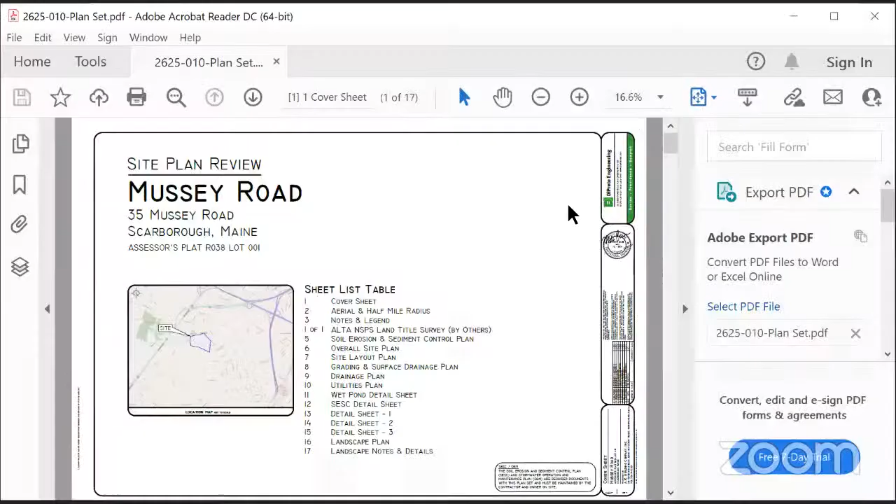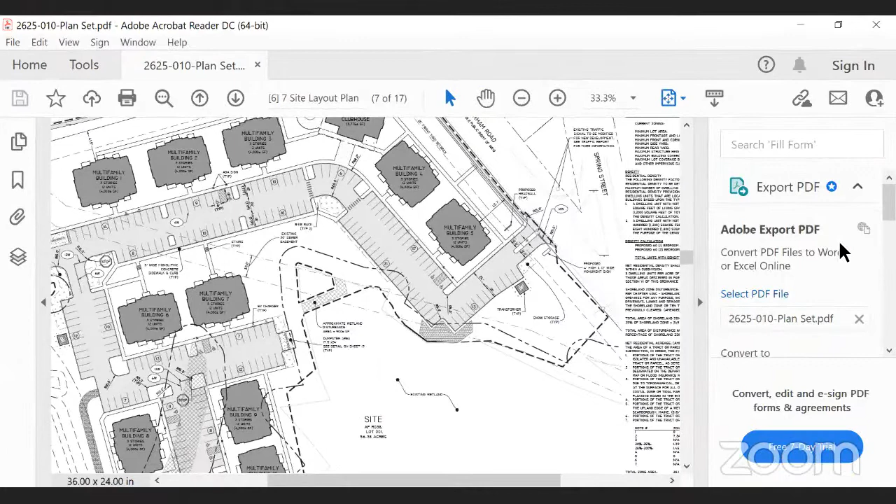Hi, good evening. This is Pam. I'm having a little bit of difficulty sharing my screen right now. I'm not sure what's going on. See if I can allow you to share. Try that. If you're having difficulty, just so you know, we've got a substitute for Doreen taking care of this. Yeah, it's not allowing me to share my screen. Not sure. My apologies for that. Okay, we're just going to bring up the plan sets. Thank you. Just need 1 minute to pull those up on the screen. How's that? That's great, Eric. Thank you. Yep.

So as you can see there, right there on the site plan, our project is located at the corner of Mussey and Gorham Roads. We are proposing 10 12-unit buildings with a mix of 1 and 2 bedrooms. Some of the things that we've talked about with this board in the past is how do we kind of make it fit within that village feel with the TVC zoning. So some of the things that we've added through our conversations is multiple connections down to the streets from the buildings. The buildings are 2-sided, they have an entrance-like feel both from the street, but also from the parking lots as well. The clubhouse is centered at the corner, which includes not only our management office, but a fitness room and clubhouse community room as well as the pool.

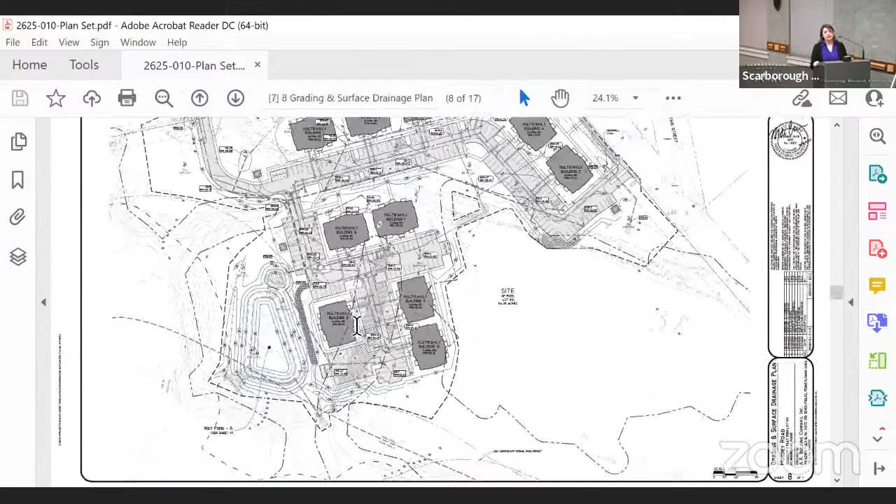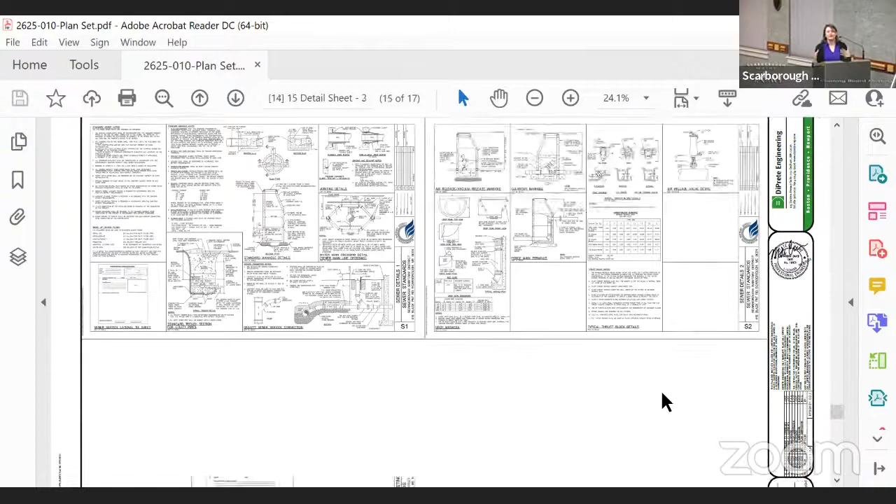I think if you go to one of the other plans, you can also start to see some of the landscaping that we put in and around the buildings, just to kind of really emphasize that street view along Mussey and Gorham Road, but also kind of adding a bit of privacy to the clubhouse and pool, like we discussed with the board last time. Some of the other things that I think the board had comments about was the lighting, so since last meeting we have fixed that to meet your standards. And then some of the remaining questions that we had out there from the planning report that we saw from Eric was that he asked a little bit about the timing of our offsite improvements. So we plan to do those ahead of the Downs project and to make sure that we're coordinating the timing of our pedestrian access.

So what we're building isn't ripped up by the Downs moving in the future. We'll make sure that's coordinated, and we're planning on doing that next year.

Some of the other questions were about the site plan elements, particularly the dumpster area. We typically do that as a design build. It will be a mix of CMU block, brick, and fencing to make sure that it's enclosed.

Another question in the staff report was about addressing. I've worked with the town and come up with two names that haven't been used anywhere else in the town, so we've established those. One is Nonesuch River Lane, and the other is Winter Green Lane.

The other question was about the offsite pedestrian improvements, and Nikki has worked with the town's consultant to figure all of those out. If you have any specific questions about it, Nikki can certainly come up and walk you through those.

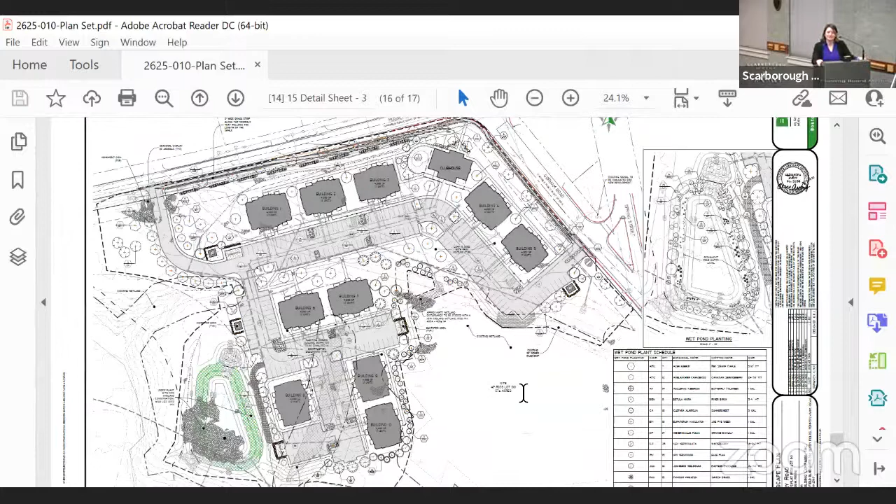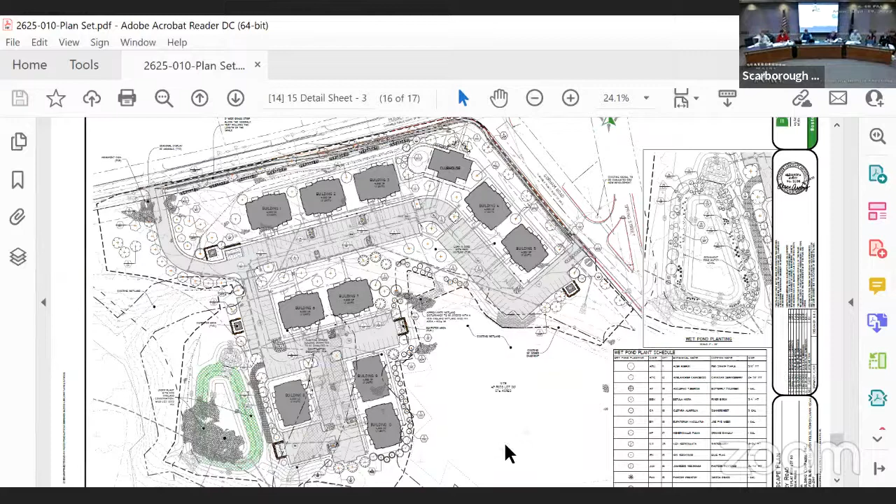Thank you. All right, thank you. This is an item that is available for public comment. Is there anyone in the room that would like to make a comment? Anyone online with a hand raised? No? One person, Madam Chair.

All right, let me promote them. All right, Denise, you should be able to speak. Hi, Denise Hamilton, 167 Two Rod Road.

The applicant had mentioned that these units would be a mix of 1 and 2 bedrooms. Has it been indicated how many of each? Because I'm concerned if there's been any consideration of how this could affect 8 Corners Elementary School, if there's any K through 2 children in those units, and the school being beyond capacity already. Thank you.

For the applicant, could you give us the numbers please? Yes, I certainly can. We are proposing a 50-50 mix, so 60 units would be 1 bedroom, 60 units would be 2 bedrooms. And I can say, looking at our projects, we have a portfolio of over 9,000 units. Our projects don't typically attract families with school-age children. We don't have the playground facilities that usually bring in families.

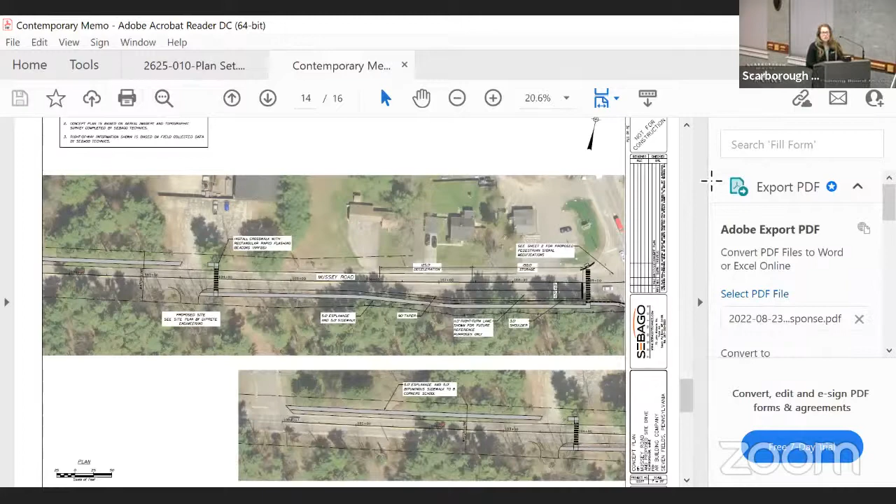Any particular diagram you want to see first? Let's go to the first one at Gorham and Mussey. I'm Nikki Conan with Sebago Technics, by the way. If you go down to the next sheet, yeah.

So basically there aren't pedestrian accommodations at the intersection currently, and the Downs is also not proposing to do any pedestrian accommodations, so everything you see here is associated with our project. At all of the crossings, there should be landings with detectable warning fields and ramps. It's hard to tell at this scale, but there are pedestal poles with push buttons and pedestrian signal heads. In some instances they're mounted to existing strain poles, in others there are actual new pedestal poles, but we'll work through final placement and conduit runs to make sure everything's ADA compliant in final design.

So is there a reason those aren't on the site plans as well? They can be, yeah.

This got submitted as a separate response to the traffic comments, but if the board would like to see this on the site plan, we're more than happy to coordinate that effort.

I think because we did have some comments earlier on, and we've been talking about it a number of times, I do think it helps round out the development and how you're fitting in with the rest of the zone and the neighborhood. I think it's great that these are being added, and it would be great to tell the whole story on your plans. So thank you for pulling those up.

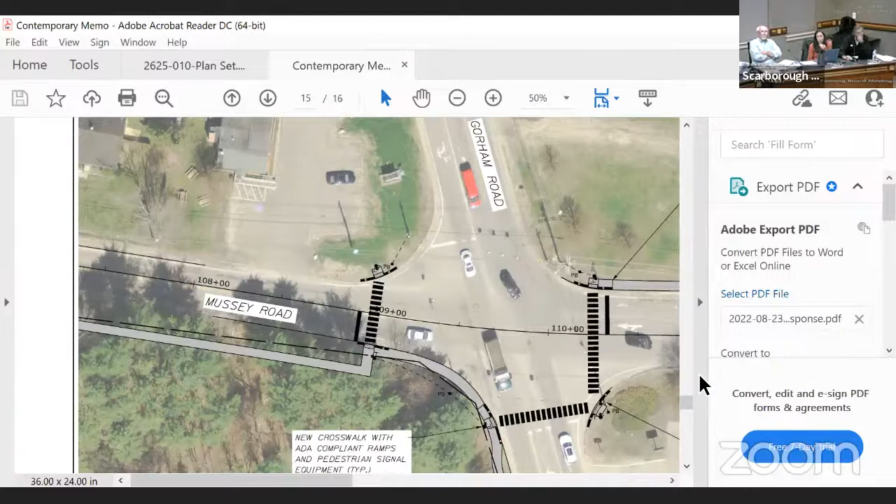But I'm curious about why right at the corner you're holding that so close to the curb line and the travel lane. I think it's great that along the other frontages of the development you're able to hold that back a little bit to provide both some esplanade and buffer space to the roadways, but also for snow storage. So I was just curious why right at the corner, particularly if there's no ramp right there, it's in that location and not held back a little further.

Yep, so originally the intent was—and Eric, if you scroll back up to the first sheet, that does show what the right turn lane would look like—there is existing curb around that corner. So the intent was to put the sidewalk at the curb line and not interfere significantly with their frontage, because the clubhouse is going there and they're trying to put landscaping and make that more of a focal point. But we can definitely work through it if the board would prefer that be set back like the rest of the sidewalk. I wouldn't think that would have significant grading impacts to what's been proposed.

Okay, I wasn't sure if it did. I don't think it's super steep right up there against the corner, but I think what you're showing elsewhere on the site is great, and it would be great to continue that around that corner if there's sufficient room. Absolutely.

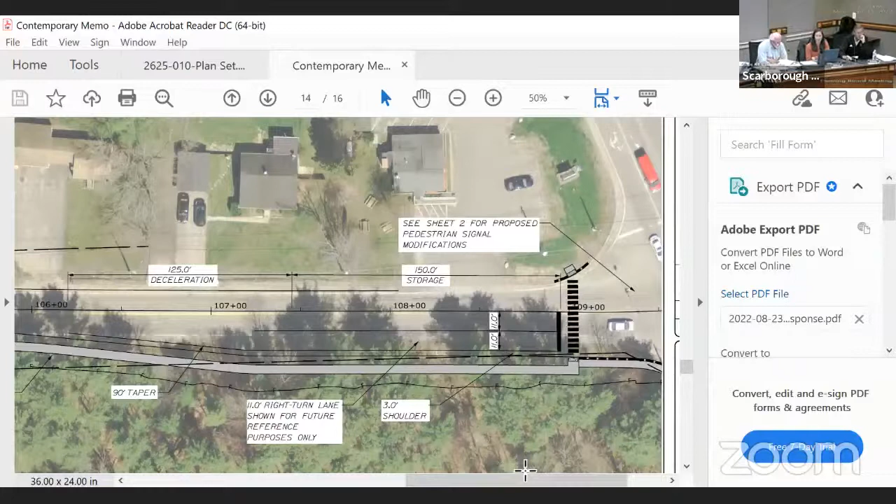Other than that, I'm fine with staff working with the applicant down the road for specifics on the dumpster enclosure, and I don't have any other questions.

Thank you. Roger? I'm basically satisfied with everything too, especially if you could address the comments my colleague has. I do have a question though, a technical question for Eric on the land trust letter.

We'll talk about that. Is that specific to this? Oh, it's not? I'm sorry. No, we will address that under correspondence. Okay.

All right, I have one additional comment. Just as a reminder, we did receive communications under public opinion. We did receive communication from Dennis and Barbara Doherty concerning our approving this. They were very enthusiastic about the project.

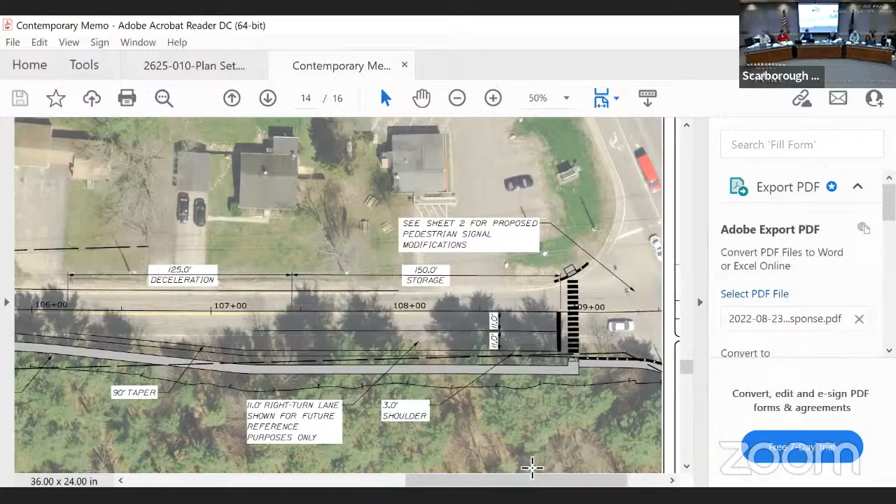Okay, as soon as you have that permit, work with the staff, make sure you've dotted all your i's, crossed the t's, got everything completed, and you will go on the agenda as a consent item. Thank you very much, everybody. I appreciate it.

Item number 7, Crossroads Holding LLC is requesting a subdivision amendment review for the 5th Amended subdivision of the Town Center Residential District to include a drainage easement and 8 single-family homes on Lot 35. Property is further identified as Assessors Map U55, Lot 35.

Eric, thank you. This project was previously before the board back in August. At its August 29th meeting, the board generally inquired about communal spaces and some lighting detailing. Staff has remaining comments on smaller items such as addressing and some fire lane striping, and has prepared a draft motion for the project for the board's consideration. With that, I turn it back to you, Madam Chair.

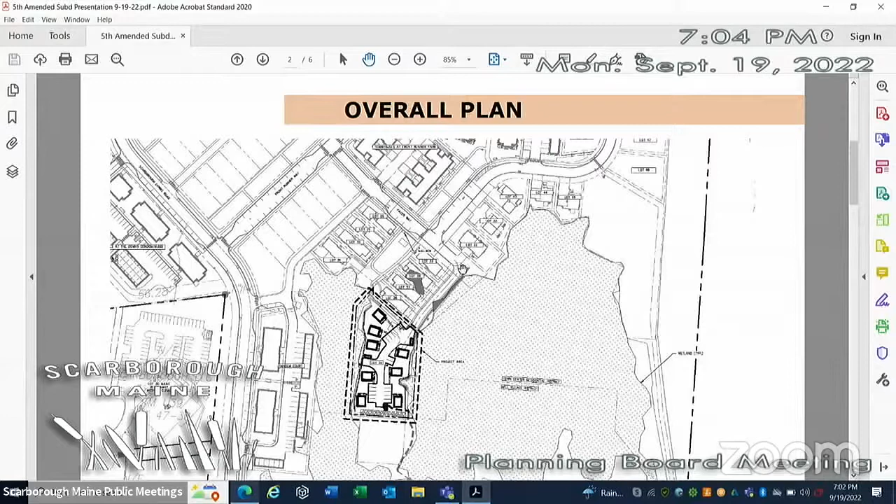Plan updates. As you can see, we're still proposing 8 microhome units, same orientation, as well as 18 parking spaces. I think 2 per single family unit with 2 extra visitor spaces. So a couple plan updates that are shown on this screen that weren't in your package that went in for this meeting.

Working with town staff and fire department and the trash collecting vendor, we've actually increased the private access drive in this portion to 20 feet of paved width. That gets us down to where the hammerhead turnaround is proposed for the fire truck as well as the trash vendor. So we've removed or eliminated the reinforced turf and mountable curb on either side, making it easier for all parties to get down to that location.

Another item that was not in your packet that's been revised since was the trailhead location that enters the project down at the south.

Working with the town engineer, we've actually provided the access to the side of the access drive. Even though there's no snow storage proposed at this location, we understand that plowing can sometimes push snow even where it's not delineated. So we've moved it to the side to ensure there's no snow plow piles prohibiting trail use in that location.

In addition, we provided bollard lighting, which was included in your packet, at each trailhead location and the sidewalk to the north of the site, as well as in the middle, to provide some lighting for residents of the project, as well as some guidance for the trail goers passing through the site.

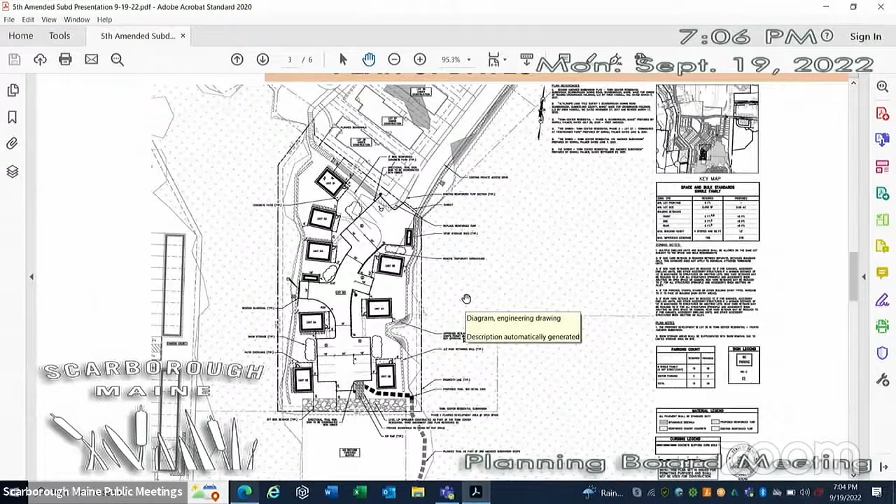So, key updates and comments we've received to date. As mentioned, trash pickup's been reviewed and approved by the vendor. For fire department access, we're providing a 20-foot clear width, no fire lane, no reinforced turf for the fire lane. This is all paved locations per request, so we've made that revision.

Private alley and drive width. This private alley that we're proposing is consistent with or beyond what we've been doing in the Downs and in the town to date. What I've highlighted here in red are private alleys that we've provided in town center residential to date. I won't go through every single one, but essentially there's either 20-foot paved width or 16-foot paved width with reinforced turf.

Hayloft Lane here, Daisy Cutter by my mouse, Futurity Lane down here. There's an unnamed private access drive up to townhouses, as well as the one approved through the 3rd amended town center residential subdivision, which is essentially the access drive provided to this site.

This location on the right is a blow-up of right south of Hayloft Apartments, located right off of Daisy Cutter. What I provided this for was to show visitor parking spaces for single family residents along here. It's at essentially the same width and design that we're proposing tonight for the private access drive. I just wanted to draw everyone's attention to that.

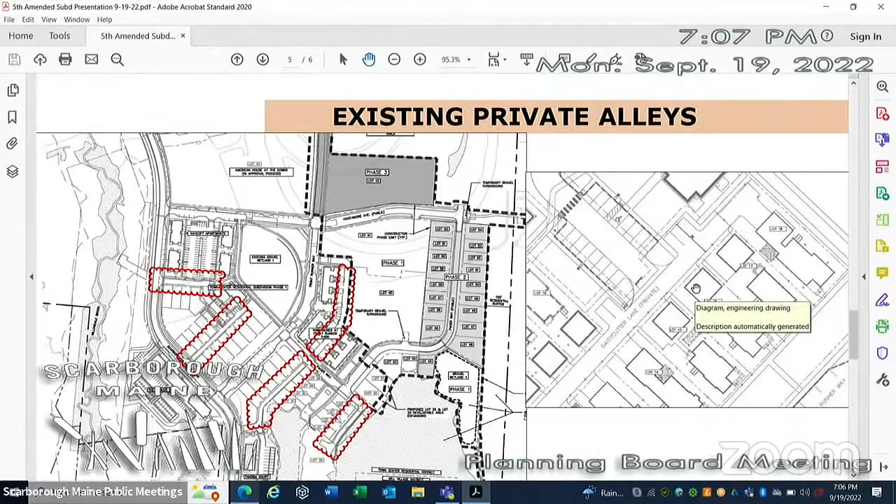I know there was a request for the drive aisle, and I want to point out that while this isn't a formal parking lot drive aisle, we understand the town has recommended that this would become a waiver, reducing it from the typical 25 feet to 20 feet for our project. So we are fine requesting that as a formal waiver.

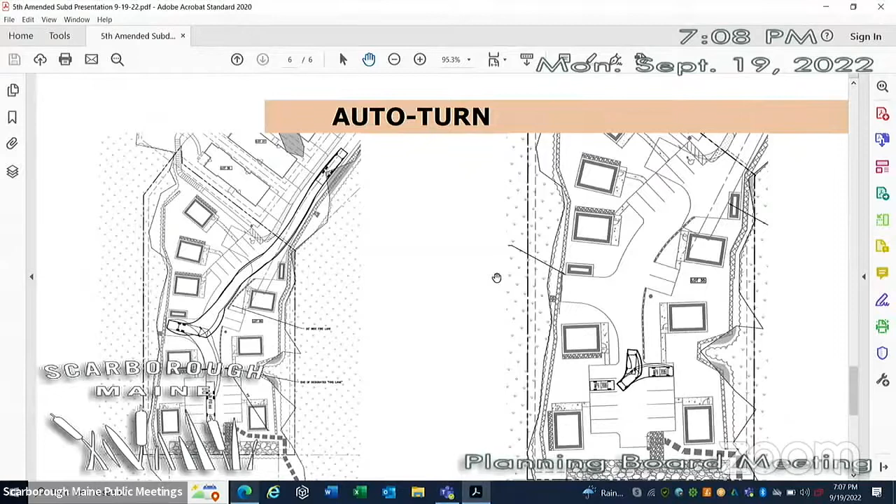We just want to show the movements and show that the design vehicle for this site is meant to be tight, meant to feel like a small residential design given the size of the units we're proposing here. So we mentioned that, but we will formally request a waiver if it's required.

I did mention previously the bollard lighting as well as the trail signage has been provided. In addition to the bollards at each end of where the trail connects in, we're providing wayfinding signs that will work out the details directing trail goers to the north or south end of the site.

In addition, I'll let Crossroads discuss this if they want to, but they've scheduled a meeting with the Housing Alliance per request from the board from the last meeting. That's all I have. I'm happy to answer questions. I'm looking forward to hopeful approval. Thank you.

Thank you. This is subject to public comment. Is there anyone in the room that would care to comment? If so, please approach the podium.

Do we have anyone online? No one online. All right, in that case, as I can find my gavel, public comment is over.

Turn this to the board and let's start down this way. Chad.

So the shared or common building, could you review that one again? From the last meeting, what was contained within that?

You talking about the proposed storage sheds on site? Yes, those are still located at the northern end and one down in the middle of the site. Those are essentially a 4x8 storage shed that's also proposed as the trash pickup location. We worked that out with the trash vendor to have these locations be picked up right there with them. So it's secured, correct, they'll have a door. It'll have a door and the ability to lock and secure it. Great, thank you.

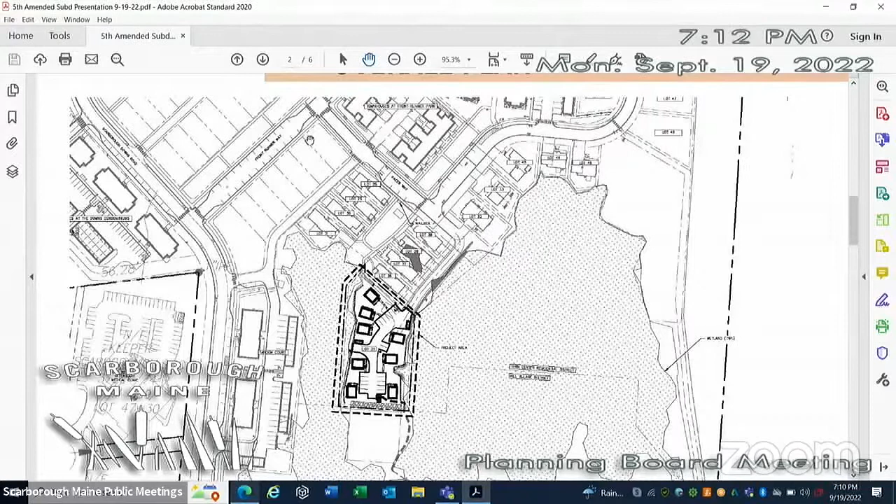Sure. So when you do amendments to an existing drawing, that's how we do this to make our life easier. I try especially hard to better understand by pictures and colors, there's lots of crayons I can do myself with that drawing. But I'm looking at these two sets, and I don't know where these 8-family homes are, and I'm not exactly sure why they're exempt from the site plan process.

Rick, could you look at C101? That gives you a better view of where they are in the development. Let me see if I can- And we had approved that lot when we approved, I believe at the same time we approved the cottages and the open space off of Pacer Way, pretty much at the same time. So yeah, I kind of got it now.

So on the first, second drawing of the set, it shows the empty lot. Then on C101, it shows the buildings in the empty lot. Okay, and if you take a look at that, still on C101, you can see the trailhead that goes down and connects to Gristmill Lane. Yeah.

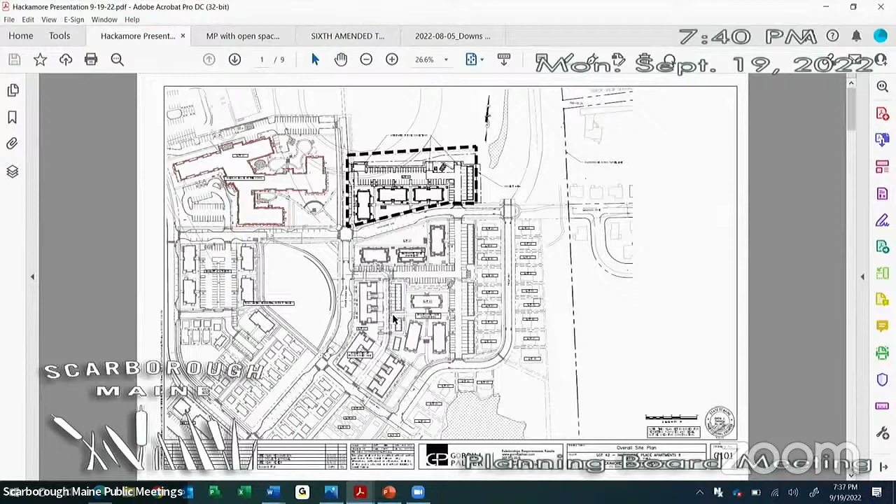In terms of more detailed layout, there's 3 buildings proposed, with 15 units per building. They're configured to, in a way, mirror the layout of the apartments across the street, but also have a nice strong connection to both Front Runner Way, which is on the left here, as well as Hackamore Avenue below the units on the plan.

There are 2 access points. One will be off of Front Runner to provide access across from the senior care facility. Then there's another access point proposed directly across from the apartments across the street on Hackamore Avenue. This is the vicinity where there would be access easements. These have been designed so they can provide access to this project, but also in the future as more planning occurs, to provide internal driveway connections to development just to the north. This driveway coming off of Front Runner Avenue, coming in, you would turn right to access parking for these units, or turn left to access future development there.

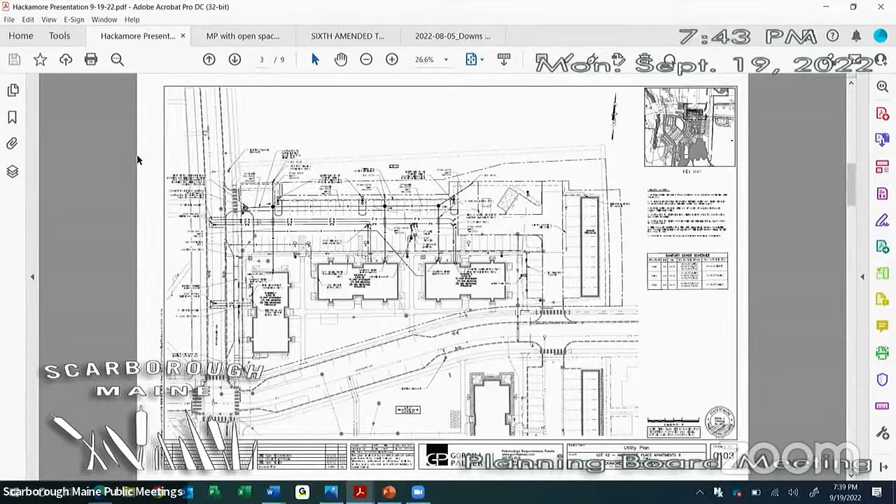I'll jump to the utilities, and Drew will jump up and explain more details on those. The primary utilities to serve the project will come off of Front Runner, and Front Runner has not been constructed yet, so that's good from a connection standpoint—we're not getting back into Hackamore Avenue for utilities, which is at least binder paved at this point. So water, sewer, most of the utilities are coming off of Front Runner to provide services to each of the buildings. We've designed them to also be able to serve future development to the north, particularly for sewer, and Drew can jump into those details if you want to hear about those.

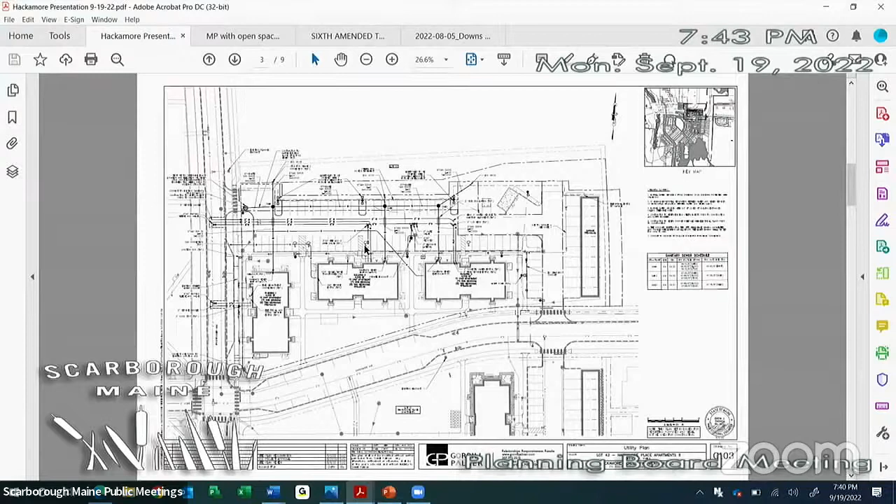In terms of the landscape plan, this is the landscape plan. We've designed this somewhat similar to the apartments across the street, with a larger front lawn area between Hackamore Avenue and the buildings. We also have a terrace area for outdoor sitting and activity for residents, located at the crossroads of the sidewalk system. There's robust plantings around the base of the building, as well as street trees around the lawn area, and also along the perimeter of the buildings by the parking lot.

You'll see on this layout, and also when we get into the building architecture, that the first floor programming is a good bit different than other apartments done at the Downs, where there's actually 7 units on the first floor.

So 4 of those units are accessed directly from the exterior, with sidewalks to each of those entry points into the first floor for the end units in the building. Then there are 3 units that access the first floor from the common hallway. And of course, the upstairs units are accessed from a common hallway and stairway.

So we've designed that in a way to provide more individual entrances and outdoor patios for those 4 units on each end of the buildings.

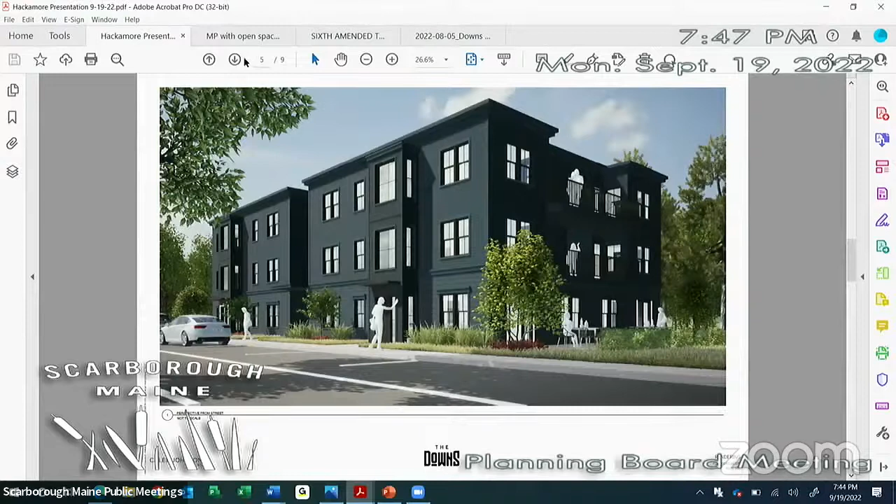We're also varying the siding width and material between the first floor and the upper stories. That gives a sense of the aesthetics of the building exterior, and this shows you the typical elevations.

And I think with that, I'll stop there, and I'm pleased to answer questions that the board may have.

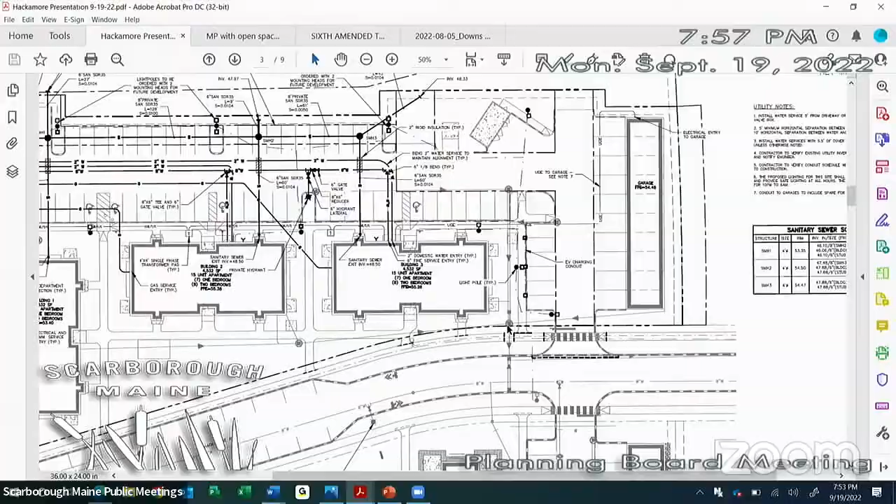So you're putting power into the garage? Yeah, the intention with this site plan is to actually have a separate transformer for that area of the project. We've run into trouble trying to manage some of these off of one building's house meter, and we're working through that. So that's the intention, is to do that installation, and we've also been doing conduit for future opportunities.

We're actually meeting tomorrow with Revision Energy to talk more about different charging opportunities, in terms of how you can group them so they can charge a car faster, and then when it gets near full, it can shift power to another charger on that same pedestal, among other things. So we're just meeting with them specific to this, because as you know, we're not experts, and it's a very emerging kind of thing in terms of how to incorporate it. But that's our intention here.

I think the note about the future is it's also more as time goes by. I'm just worried that we're missing opportunities in our residential areas specifically, and I've mentioned it more than once. So regardless of that, I'm glad to hear you're working on it. Are the ones you've done networked, or are they just off the meter? The ones we've done so far on the project have been off the meter and tied into one apartment building. That's all I have, Madam Chair.

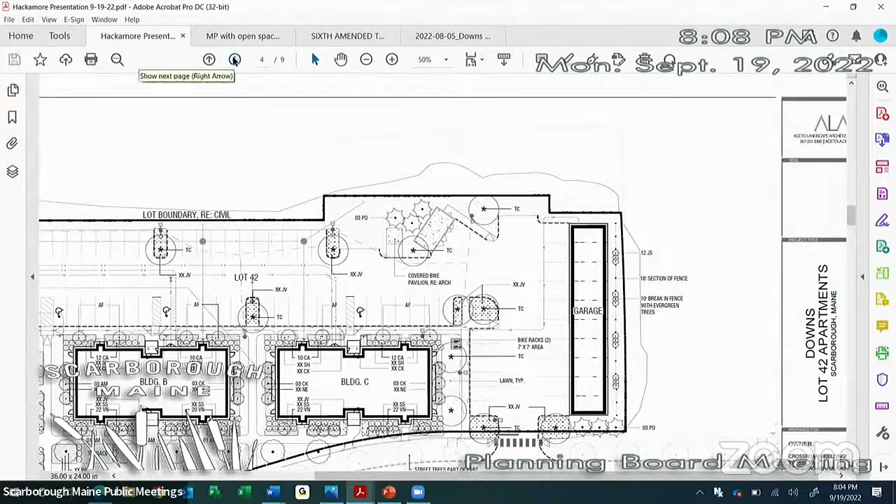The fencing and the landscaping in back of the garage, does that appear in any of the material you sent? I don't recall seeing it. It's on the landscape plan. But it really isn't effective for me to see how it buffers the garage up to the last 2 feet without really seeing how that works. That's not helpful to help me decide whether that works or whether we need to see the windows. So I would appreciate being able to get an artist's view of the fence.

Which is composed of what? It would be a wood fence, and the intention is that it's 16 feet long and 6 feet tall. Between the fence sections, there would be a comparable distance of landscaping so that there's a pattern that's created. The wall itself is only 8 feet 6 inches tall, so you wouldn't see the rear of the building.

Okay, when you say it's a wood fence, is that a stockade fence? What kind of fence? I thought it was in our package, but if you could show it. I'd appreciate it if you could point that out to me. Just put it up on the screen and show the construction style of it. So that's solid? It's slatted, with space in between. And the plantings in between?

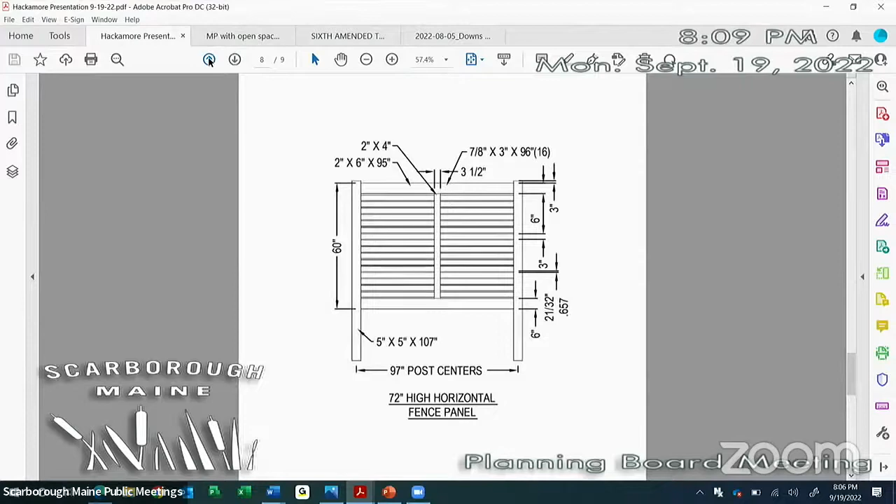How does it look against the garage? The plantings aren't shown here on this view, but they're on the landscaping plan. So what you just looked at are the fence sections, shown here. Then there's evergreens in between each fence section, and then another fence section. There's 1, 2, 3, 4, 5 sections of fence, and 4 segments of plantings in between.

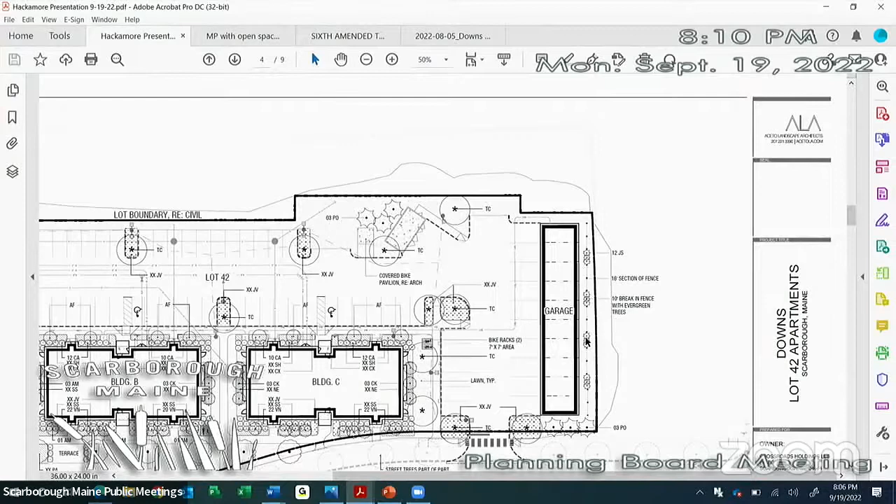I think it looks like the plantings are only a 10-foot gap with 3 shrubs that would fill the space. Is it all mulched in back or is it turf? Behind the garage, between the fence and the garage, would be crushed stone for a drip edge. On the other side of that would basically be the property line, grassed into whatever occurs to the east of the site. So the fence is right on the property line?

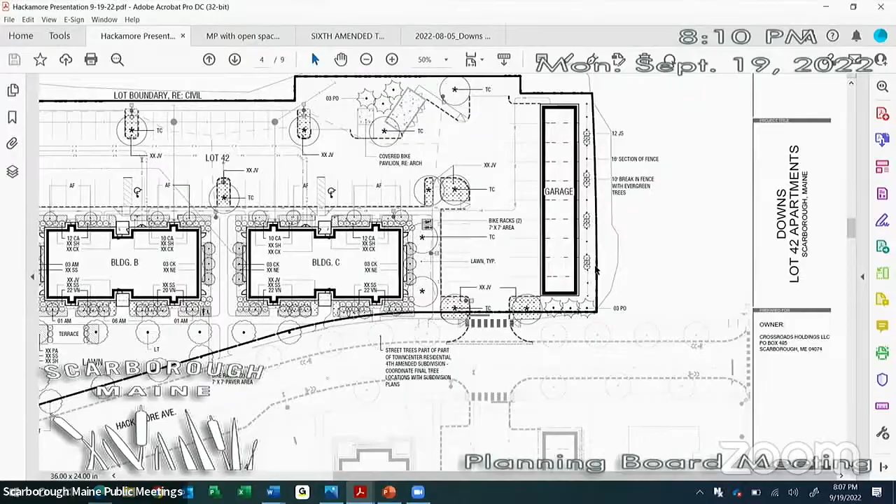No, it's 3 to 4 feet. What's in between the fence and the property line? For now, it would be grading because we don't have a plan yet for what is to the right. So it would be a slope until that area is designed, and it kind of matches the grading on this site. We don't have programming for that area yet.

So water runs down, is that runoff there? If you've got the runoff, you've got the drip line. There's a drip line and an under drain that takes the stormwater, and I believe it ties in. If on the other side of the fence you have nothing planned except some grading, what's to prevent that from eroding? We actually have a gutter along the back side of that building to collect the runoff into a small roof drain system and get it to the location we need, which is at the southern drive.

So what Dan was mentioning is going to be a crushed stone strip, just a construction strip off the back of the building up into the fence and the tree buffer. Beyond that, in between the tree buffer and the property line, we're going to stabilize that with vegetation, so it's going to be grass. Okay, that's what I thought.

Needed to know, and then we'll match the grade with the future development as well. Beyond that, we don't know what's going to happen from the next development, but it'll be grass and vegetated until then.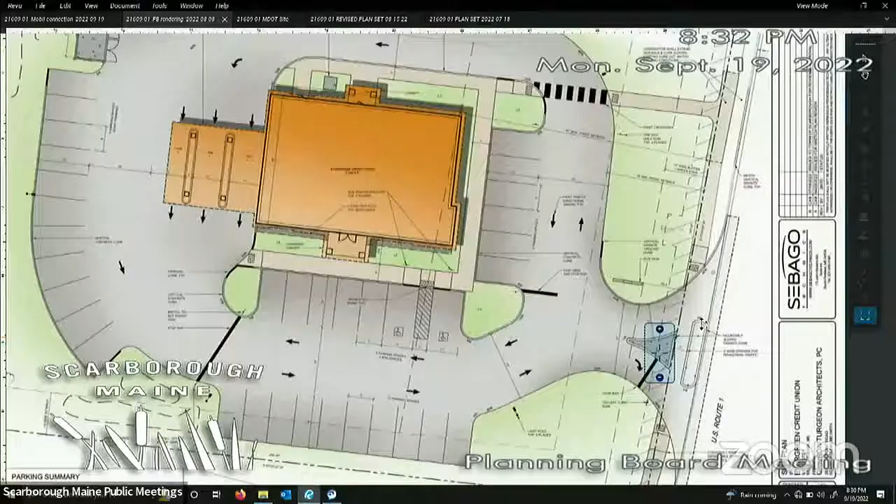Thank you, Eric. My name is Craig Burgess with Sebago Technics, here tonight on behalf of Evergreen Credit Union. When we first met with the board in August, this was the design presented at that time. Shortly after that meeting, we met with the fire department, and what they were looking for was a 20-foot clear width for access into the site. We then resubmitted the plan set, which included a revised design, shown here.

We added this concrete apron, sitting about 2 inches higher than the grade in the paved area. But planning staff thought this would allow for left-hand turns into the site, so we all scratched our heads a little bit more.

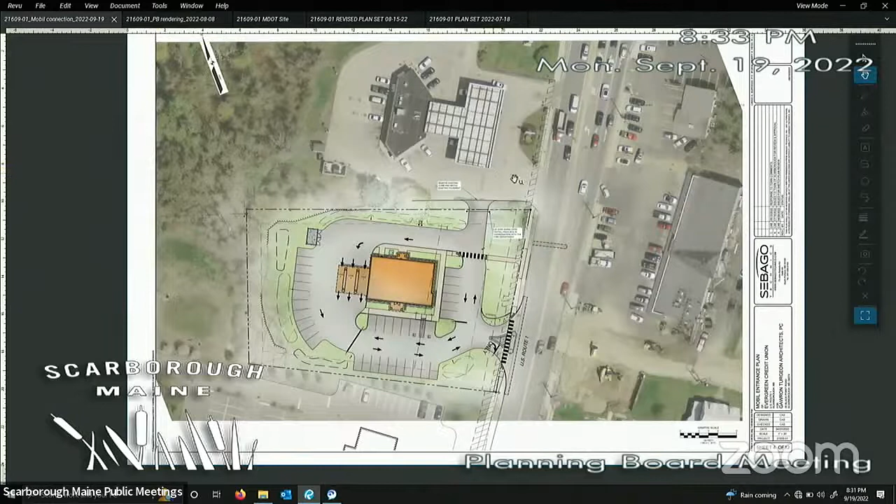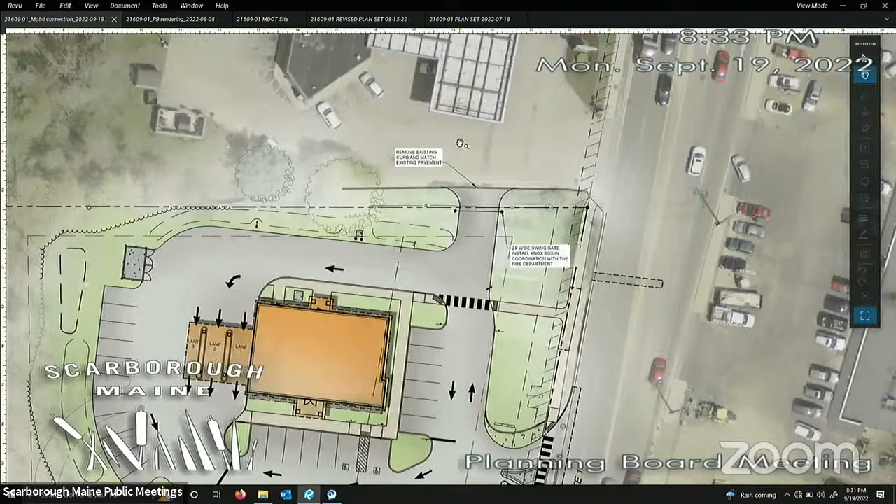Evergreen continued to work with both Mobil and the diner people, and just last week we were able to get in touch with Mobil. We're still in the process of coordinating this emergency access into the site from the Mobil gas station. What's proposed at this location would be a 20-foot access aisle directly from approximately this area—something that still needs to be negotiated with Mobil a little bit. We've shared this drawing with them today. We would have a 24-foot wide swing gate here with a Knox box for fire access, so this would be for emergency access only.

This entry would go back to a design very similar to what you originally looked at, but we would remove this concrete apron and put vertical granite curb on both sides of that right-in, right-out access. So that's where we're at.

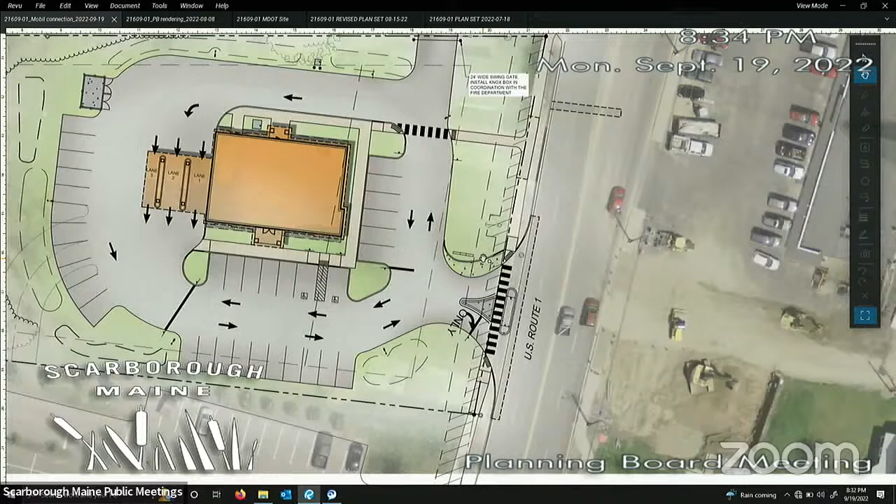Evergreen Credit Union is still working with Mobil to finalize this plan. Once this location is finalized, we'll go ahead and redesign the site as needed to show this. And there's some minor storm drainage that's also affected with this location here.

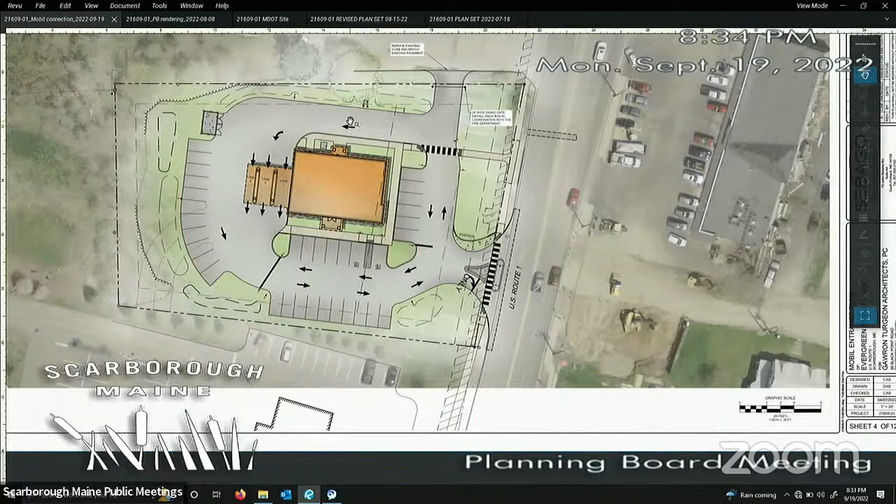The other site comments were relatively minor. There are still some remaining stormwater changes that may be needed. One of the comments was to verify that there was an actual outlet pipe to that catch basin within Route 1. The town has since gone and cleaned that catch basin, so now the outlet pipe is fully exposed and it appeared to be in good condition, but I believe in working with town staff we will further explore that, and further explore this storm drainage network here to show that it has the capacity to take that stormwater from this site.

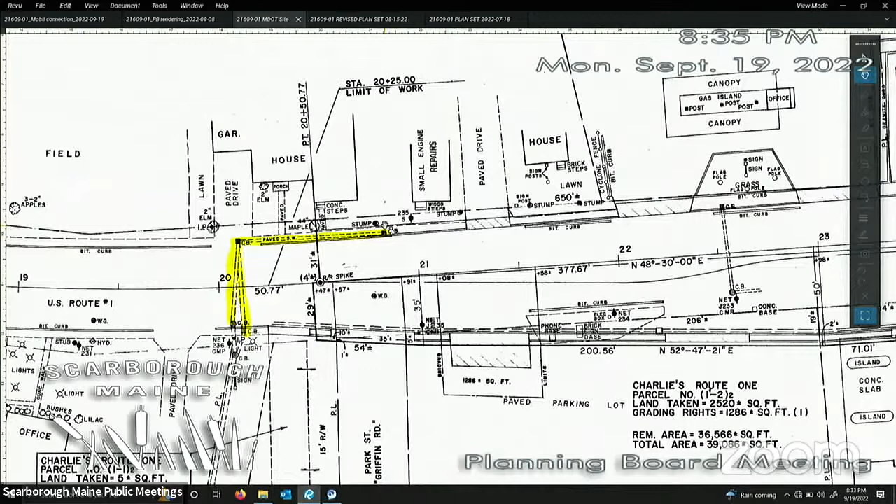Sebago Technics will plan on working with the town engineer and planning staff on that, as well as revising this right-in, right-out to better meet the town comments, and also understand that there needs to be fire access into the site. So I'm here to answer any questions you may have.

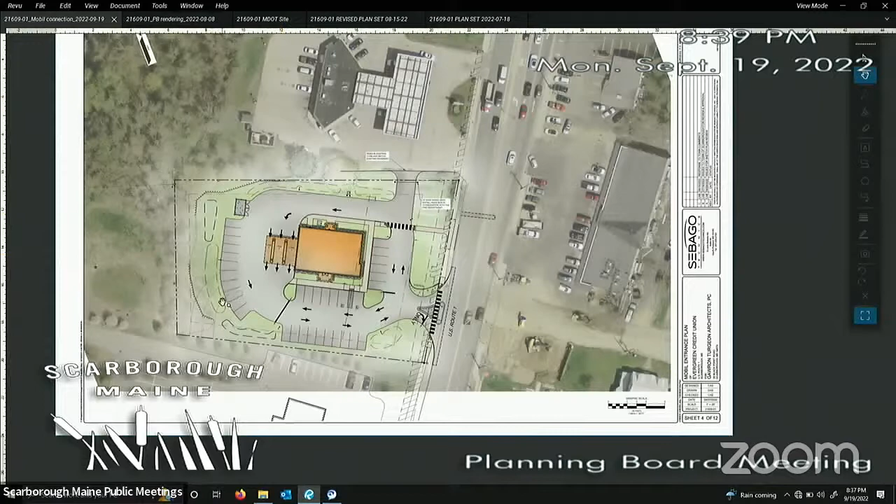The revised site plans did show in the southwest corner a potential connection to that private drive. It wasn't designed — there would be other changes needed as part of that, and again we'd have to come back in front of the planning board for any changes relative to connection to the diner drive.

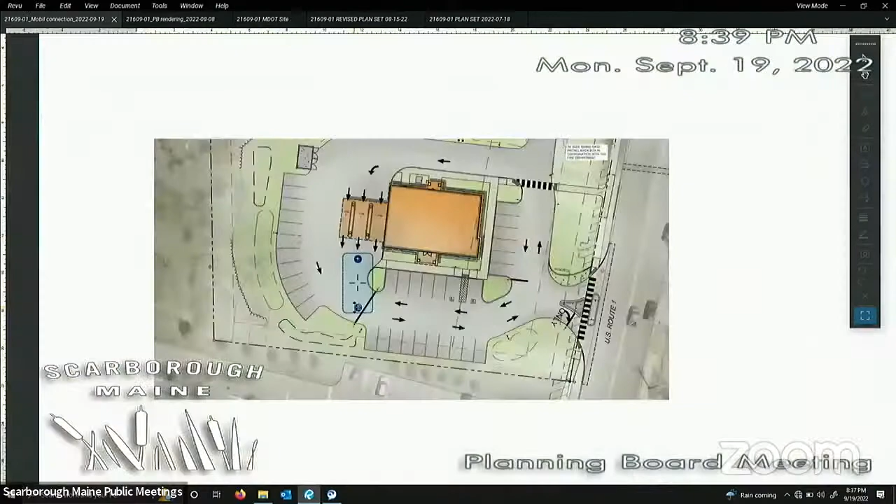Great. Another question — I'm still confused on how people coming from the south will access this property.

It's not ideal by any means, and the customers going to Evergreen are just going to have to get used to the traffic to get to the site.

Sure, understood. I don't know this offhand - do we allow or disallow U-turns at the Dunstan intersection? I believe they're not allowed, but I'd have to look into that more. I would hope so, but anyway, my sense is that is what people will probably do.

Right, so my question is, are we teeing that up here by doing that? Because if someone were to not - just logistically, how are they going to get there? If you're coming from the south, you're either going to take an illegal U-turn at the intersection, or maybe you're looping through someone else's parking lot, or you're looping around on Broad Turn and cutting through Mobil and coming back out. It's just something, it's just a question I have, and I realize it doesn't have a good answer because we're also not wanting a full access driveway here.

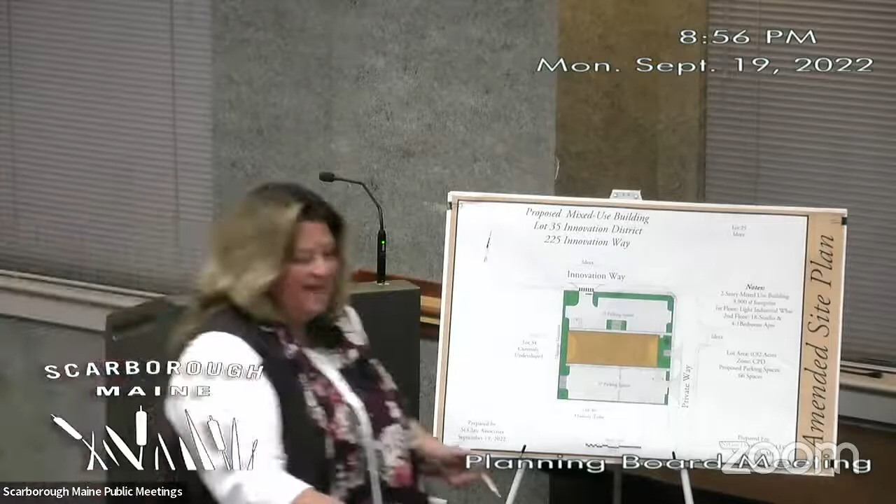So for those of you who were on the board at the time of the prior approval, one of the topics that was under great discussion was timing is everything. We were before you folks for site plan approval, but at the same time IDEX was coming forward, though they were at sketch plan review.

There was quite a bit of question about the points of access for IDEX's site, as well as the orientation of the points of access for the cul-de-sac, which is now the end of Innovation Way. As part of our prior review, we worked with you folks and with IDEX to make sure our point of access to that site was aligned directly opposite the westerly point of access to the IDEX site. That remains. When IDEX came through and actually got approved and is now going forward with construction, that entrance did not move.

As part of our design of this particular site, we wanted to make sure we had the current and most up-to-date information, so we reached out to IDEX's engineer and were able to get the final approved plans that are going to construction. So the entrance location remains directly aligned opposite the westerly entrance to the IDEX site.

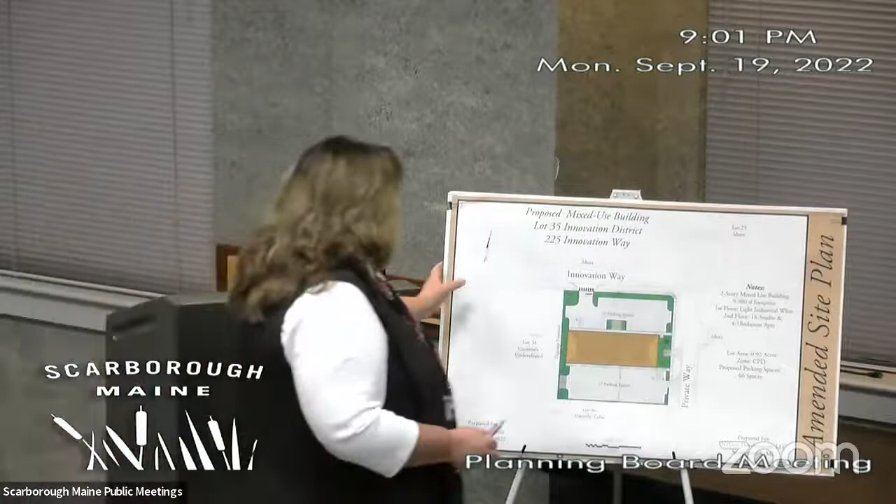So what you're seeing in this rendering view is the north and west wall of the building. You'll see that covered gathering area centrally located on the site. The door shown in that rendered view is the door to access the stairwell to the second floor. For architectural purposes, we also have windows on the first floor to balance things out, but the residences are all on the second floor.

On the opposite, easterly side, we also have a stairwell and the mechanical room, which is where all of the utilities come into the building. There is one door that also accesses the first floor of the building on that easterly side. So switching back to the site for a minute, I'm going to use this, which will allow you to also share a view of the building itself.

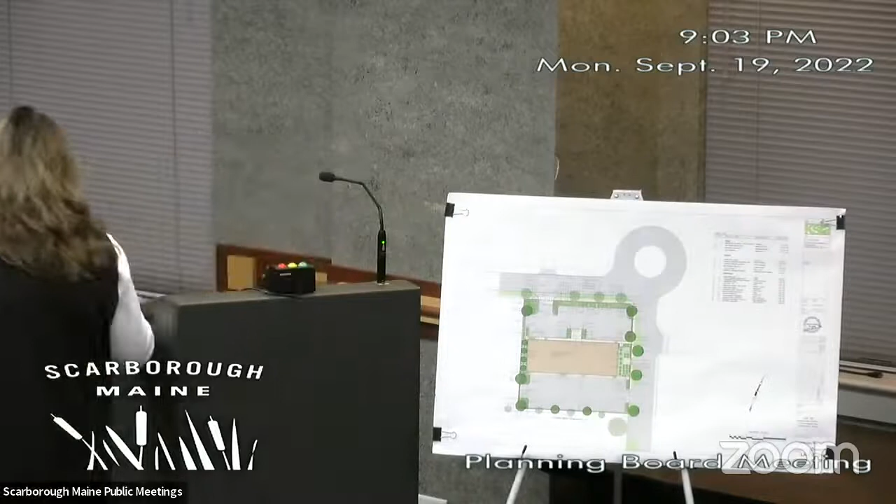As part of Eric's introduction, he indicated that staff had asked us to discuss the points of access to the site and our reasoning behind how we have it laid out. We've used the building as a demarcation point to separate the residential parking area from the incubator spaces on the first floor.

That allows the folks living on the second floor to have their access and parking isolated from the truck traffic that may be coming into the IDEX site off the private way. It also allows traffic coming into the south side of the site to use that private way as well.

So we're not adding a point of access onto the cul-de-sac. We're using the existing one that was approved by IDEX. We are proposing to have our access to the first floor, the more commercialized use of the building, separated and off that private way.

It allows us to get a tractor trailer truck into the site. We've provided a vehicle turning maneuver for truck access to the rear of the site, and as mentioned, there are overhead doors on that side of the building which would allow access into the spaces on that first floor.

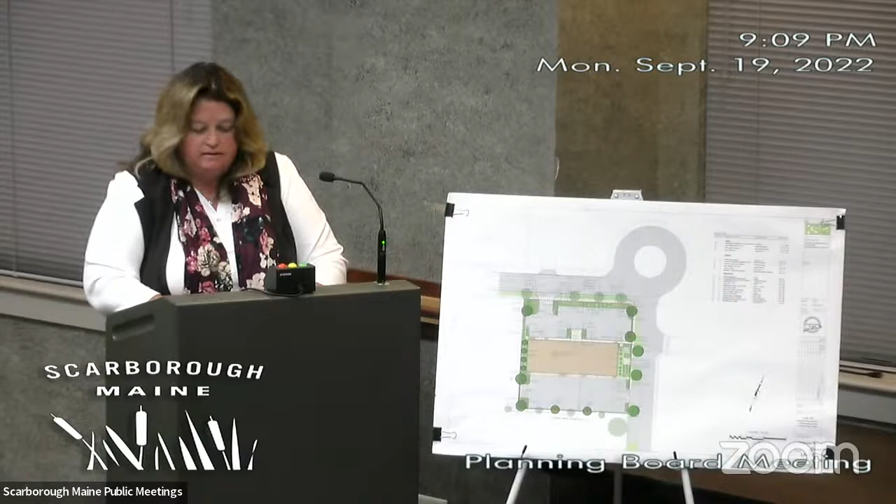Thank you. This is subject to public comment. Is there anyone in the room who would like to comment on this project? Is there anyone online, Eric? No one online, Madam Chair. In that case, the time for public comment is over, and I turn this over to the board.

Let me start at this end with Rick Meinking. Yeah, just looking at the little metrics here.

One of the concerns I have is that dumpster in the center there coming off of the private drive. That is completely dark all the time, so you might want to add some lighting in that area. I think that's the only area that would be a safety issue.

Also on your plans, I see snow storage for the commercial side, but on the residential lot, I don't see any snow storage, so we can figure that.

If I can respond to that one, you're correct, we didn't show that. In working with Keith Smith, our landscape architect who is here—and I apologize, I had intended to have Keith talk but skipped right over that—one of the things we discussed was that the plantings along the north edge of the site were designed by Keith to allow for winter storage. They're more of the perennials, the hardy plantings that would allow for snow storage in the winter. When they die back, the snow banks provide that extra screening during the winter months. So that will be the area identified on the plan for snow storage.